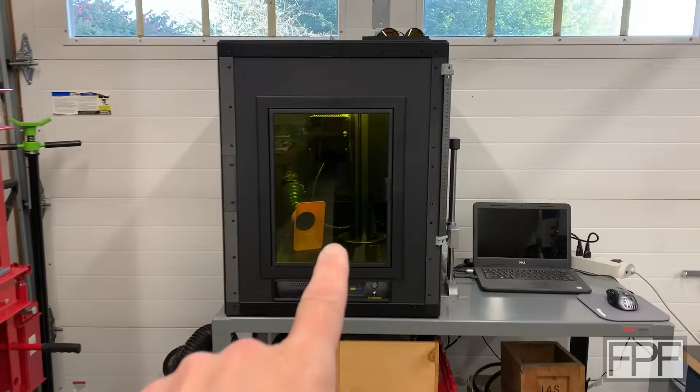It is over there. So about a year ago, right here on the channel, we designed and 3D printed this enclosure for my 30-watt Monport fiber laser. And this enclosure has worked out really great. We finished it out with lights inside so you can see what we're setting up on the engraving bed. It's got fume extraction, and all the parts for this are 3D printed with the exception of the side panels, which are just cheap corrugated sign material.

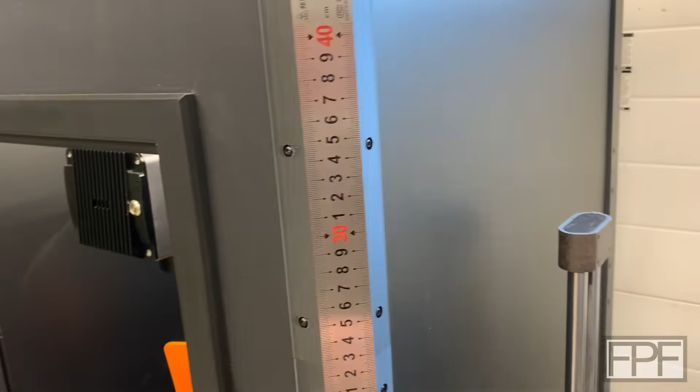Now what you guys don't know is that this 30-watt Monport is not the only fiber laser I have. In fact, someone actually reached out to me a couple of weeks ago when we did the CNC video and asked what happened to the enclosure for the fiber laser. Well, what happened to it is it doesn't exist yet. This is actually a completely different fiber laser. This is a 100-watt fiber laser from Monport.

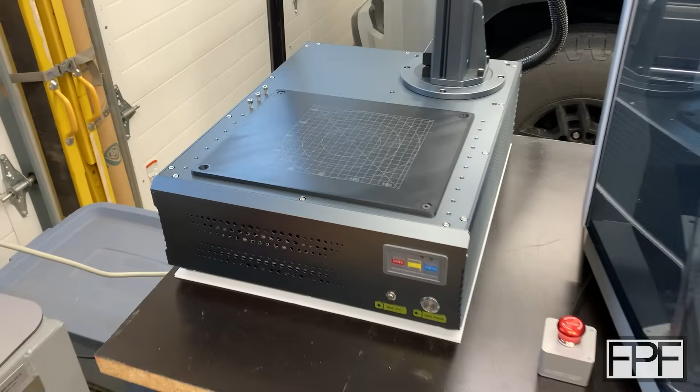I've just been really busy with other projects and have not had the opportunity to actually design and build an enclosure for this. And I want to get started on that today. And I think the biggest challenge that we're going to have in designing the enclosure for this laser versus the 30-watt is, again, this is 100 watts. And 100 watts is quite a bit of power in a fiber laser.

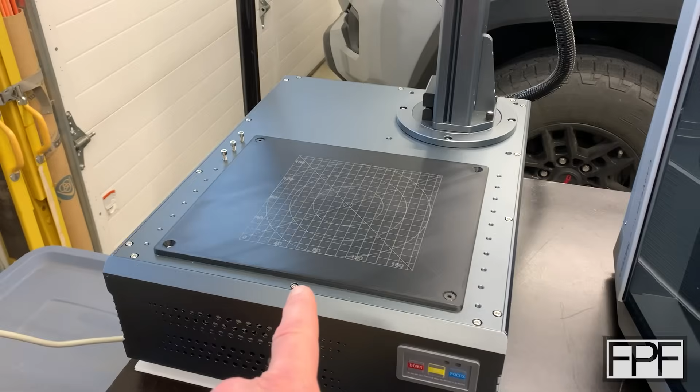Now, I understand in comparison to like an industrial fiber laser that's probably a kilowatt or maybe even multiple kilowatts, that this is still a much lower power machine. But make no mistake, 100 watts on a fiber laser is a good bit of power. This steel is almost 2 millimeters thick, and I was able to punch clear through it with this machine. I did do some just basic testing with it when I got it to ensure that everything worked and the lens was good on it.

So when we designed the last enclosure, a lot of people suggested using extruded rail like this for the frame itself. And I actually have a bunch of this left over from another project. And I think at least these 8 here, longer ones, will probably be long enough for this. I don't know that we're going to be able to use these shorter 4 ones, but I can certainly order more of these.

And I found a laser safety window on eBay that is the correct rating. And I didn't just trust the rating that they said it was. I actually test fired the laser at this with a sensitive surface underneath of it, and this absorbed all the energy of the laser. So we should be good on a safety window. And in fact, it looks like this because I've got it wrapped up in saran wrap to try and keep it from getting damaged. And this is much bigger than the window on the other enclosure.

So we should have, honestly, it's probably too tall. I don't know if you guys can get a perspective of that. So we might cut this into some smaller pieces and maybe even have, I don't know, more than one window.

This is the material that we used for the other enclosure. This is just a thin corrugated material. This is what gets used in sign making. I think we need to go beefier than this for this enclosure. It's not the frame itself that I'm concerned about.

In fact, I think the 3D printed frame parts would probably be sufficient. Even a 100-watt laser is going to take some time to burn through that. Not that the laser would never be able to penetrate it if something went horribly wrong, but you should have enough time to recognize something is going wrong and stop the machine before anyone is in danger. I think it would punch through this almost immediately.

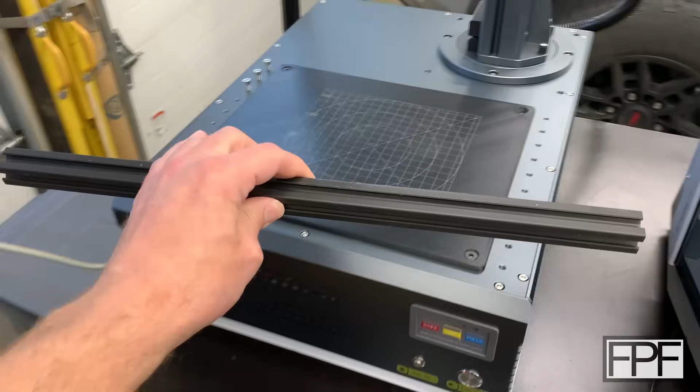So the longest of these rails, there are 4 at 760. I have another 4 at 680. And the shortest ones are 430. I think these 430 ones are probably going to be too short. The narrowest section would be the width, and I guess it technically fits, but there's only about an inch on either side.

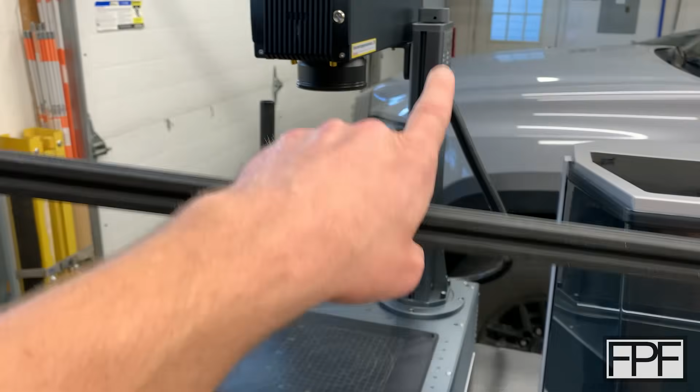You can see from a depth perspective we need way deeper than that, and we certainly need taller in the Z. This machine is actually quite a bit bigger than the other machine - it's deeper in this direction, and it also sits up quite a bit higher in the base. The top section, I believe, is the same size, but because the base is taller, the overall design needs to be taller as well. So I think I'm probably going to need 4 additional pieces in a longer length, but I want to see if I can design an enclosure that utilizes the other 8 pieces.

I want to use that laser safety window that I already have. So I'm going to get some better measurements of these, and I'm going to start drawing, and I'll bring you guys back. And welcome back.

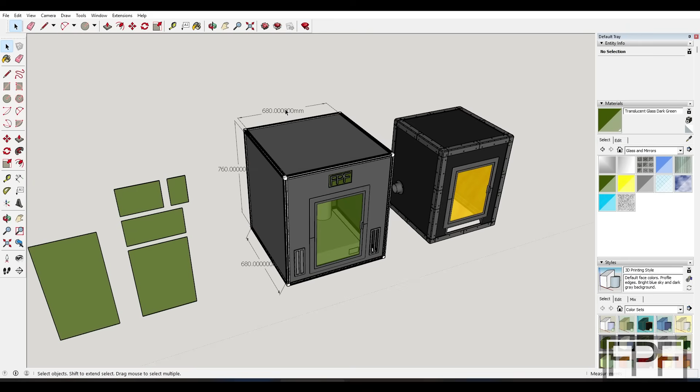A couple seconds for you guys, quite a bit longer for me, but I think I've got a design for this that's going to work. Everything should fit together, and we'll be able to reuse a lot of what I already have. So we had 4 of those 2020 sections that were 760 and 4 that were 680. The ones that were either 420 or 430, they're just too short - there's really no way to use those. So I'll order 4 new pieces that are 680 or longer, and we'll just cut those down to 680 for the width.

I also imported the design of the last enclosure that we designed. I did that partly for a comparison of size, just because I kind of already know what the size of this one looks like in the real world, but also because I figured I'd be able to reuse a lot of the design work we did on this one, because there's still going to be 3D printed parts in this new enclosure.

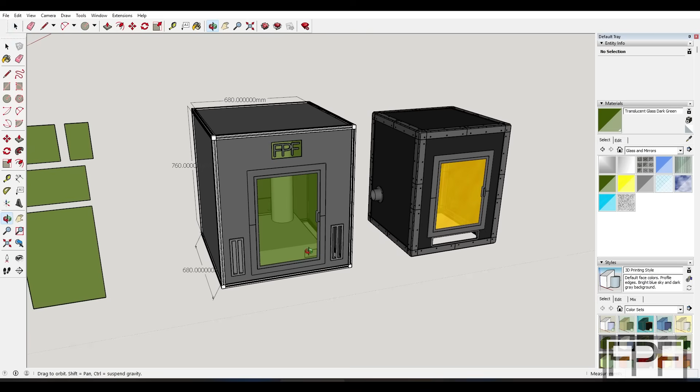It's just the frame itself is going to be that 2020 extruded rail, and these solid panels are going to be a much more substantial material. But I'm fine using 3D printed parts for the outer frame of the door, the inner frame of the door, and the vents here in the front.

We can actually reuse the pass-through for the exhaust and the pass-through for the cords in the back as is. I didn't have to make any changes to those at all. We did originally a side exit on the old enclosure, but we're going to do a rear exit on this one right from the start.

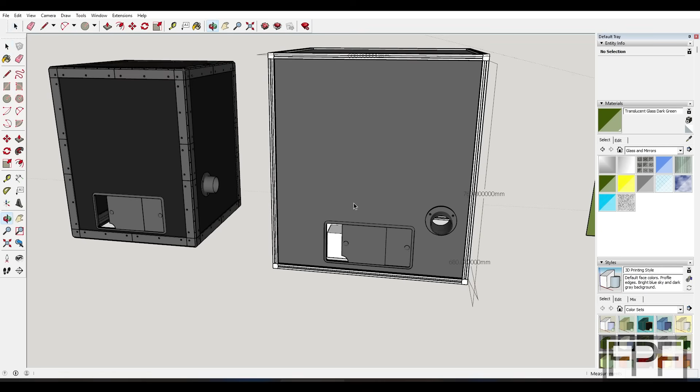And like I said, the slider here, this double door for where the cords are going to pass through, we can reuse that exactly as is. I did adjust the depth of it.

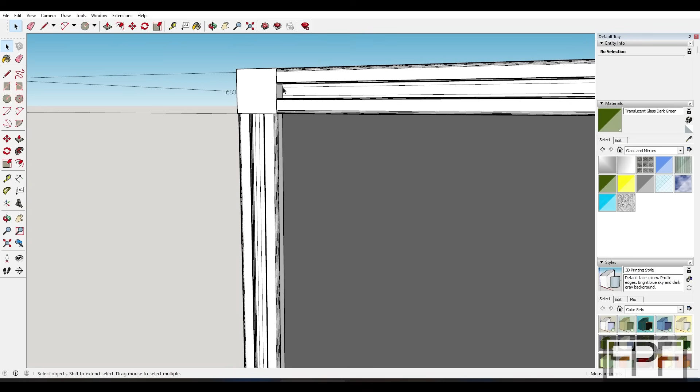I think, if I recall, the corrugated panel over here is either 3 or 4 millimeters thick. The panels for this are going to be 6 millimeters thick, and that aligns with the space we have in the 2020 rail for something to slide in. We could use a thinner material, but I think sticking at 6, this thing should be nice and stiff, and the panels aren't going to move around inside those channels.

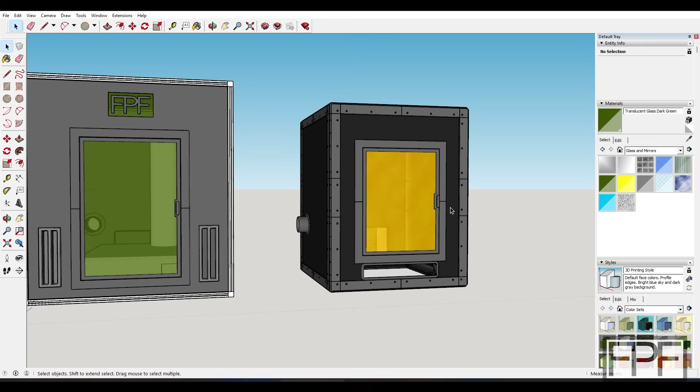For the doors, I did have to make some design adjustments. I couldn't just copy and paste the geometry or resize it to accommodate our larger window. This one was designed in a thinner coroplast material, that corrugated material signs are made from. We did an inner and an outer.

So there's the 3 pieces out here that you can see, the upper, the lower, and then the inner frame of the door. On the inside, there were all these pieces that went around the perimeter of that. Screws went in from here, and we basically sandwiched that coroplast in between all these rigid materials. It works great, and it's held up really well.

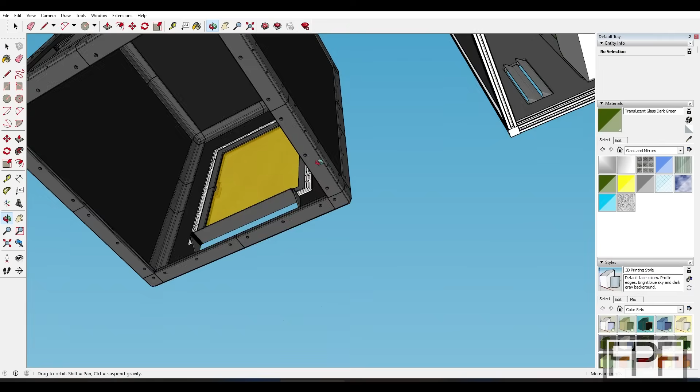I don't think we have to do that for this thicker, more rigid material that I want to use for this enclosure. I think we can pre-drill some holes in this material and have the screws go in from this side and then screw right into our parts that we'll do in either PETG or PLA that'll fit in from the front.

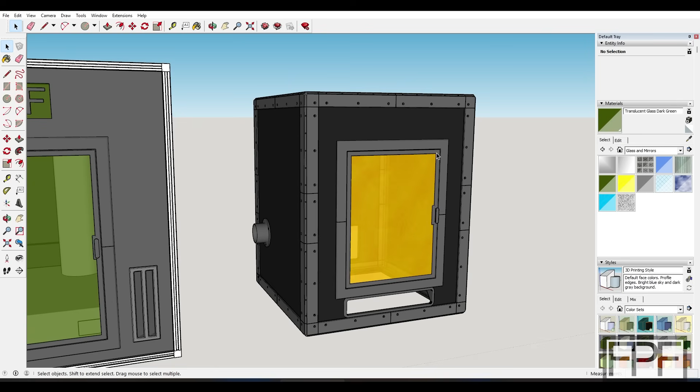Obviously the size is different as well. In fact, when I designed the inner part of this door, I think I sized it to be the largest I could print in one piece, which would have been on that Neptune 4 Max. Now that we've got that Sovol SV08 Max printer, we can do the longest dimension for this door at 500 millimeters. That printer does 500 by 500 by 500, so this edge up here down to this edge down here is right at 500 millimeters.

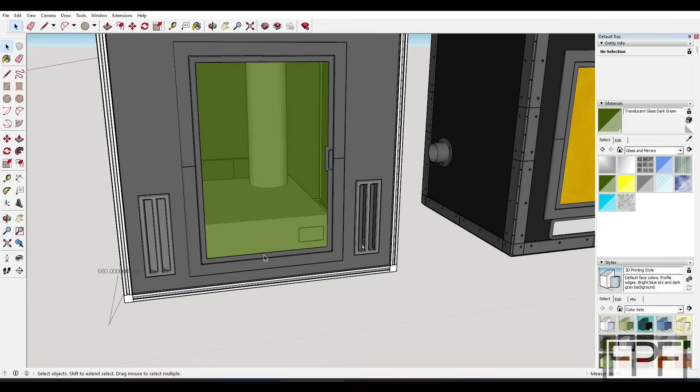Now that's the inner door frame. That means the outer door frame is still going to have to be printed as 2 separate pieces, but again, I think that's going to be fine. I didn't have any issues with doing this one as two separate pieces.

Notice there's no vent down here. The vents are on the side. That's because this vent doubled as access to the buttons. I don't want to do that here again.

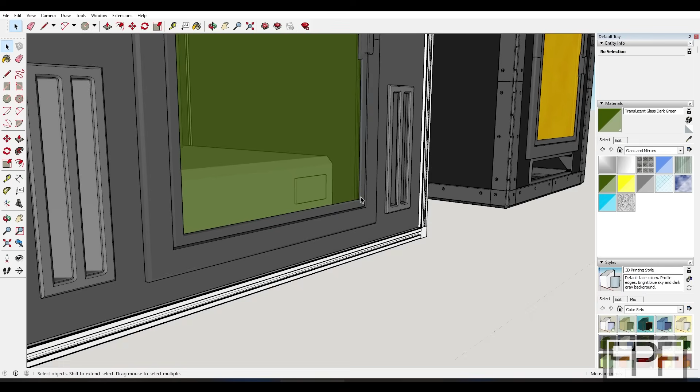What I'm hoping is with the door this far down, when the door is open, with this unit slid back a little bit because we have more depth here than we need, I should just be able to reach through and operate those buttons if I need to. The buttons you're more commonly pushing are the ones in this part of the panel up here, and those should be real easy to access. So hopefully I don't regret that.

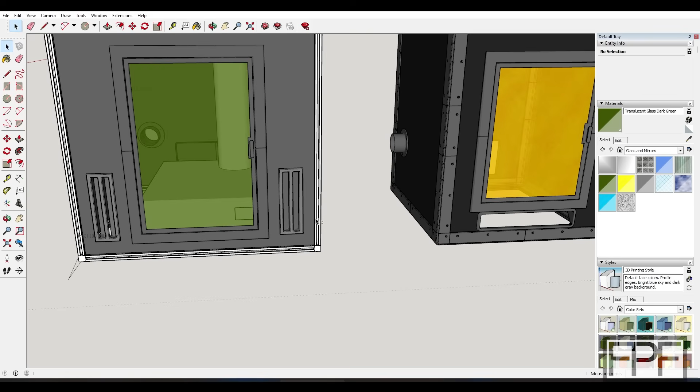But yeah, I don't really want to have a big gaping hole through the front of the enclosure again like I did on this one. I designed these vents to go on the side.

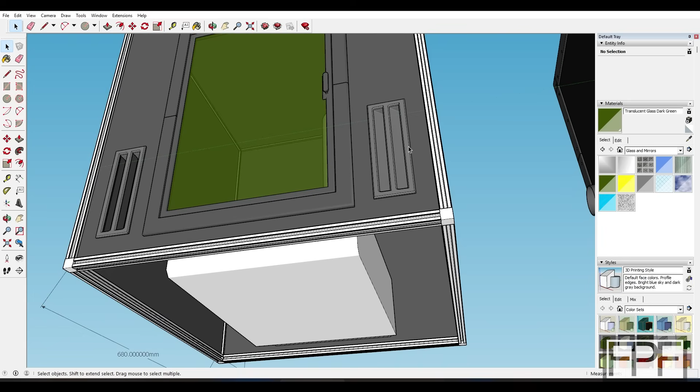The weird angle here, what I was trying to do is just avoid a situation - imagine the laser head is kind of up here. So I tried to design them so there's no way the laser light could make it directly through these slats. There's no angle you could be at where that light has a single path through these vents, regardless of what silly angle you're at, sitting or standing, that the light at a minimum would have to bounce at least once to get through here. And once it has bounced once, between the fact that it's going to be defocused and it's bouncing off something, the wattage of the laser light shouldn't be enough to do harm.

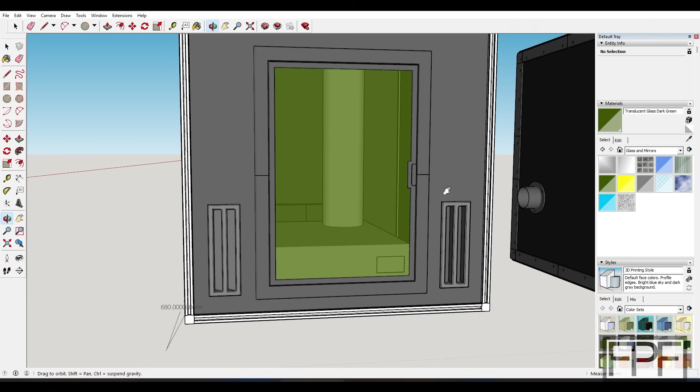I still recommend wearing laser safety glasses even on an enclosed machine. I kind of think the belt and suspenders approach to safety for something that can make you blind almost instantly is probably worth it, but that's a decision everyone gets to make. I see plenty of people operate these machines without even an enclosure, which I think is crazy, but you get to make your own choices with regard to safety, at least in your home.

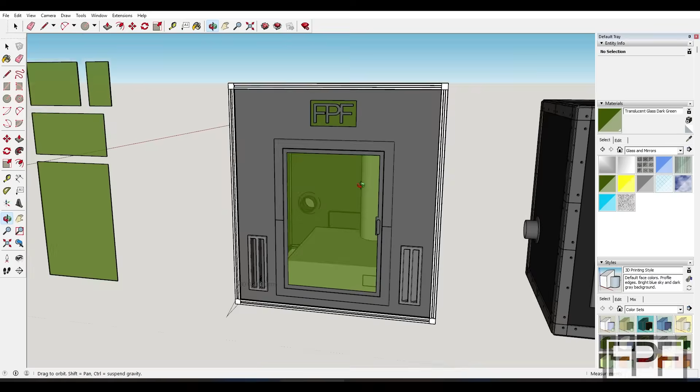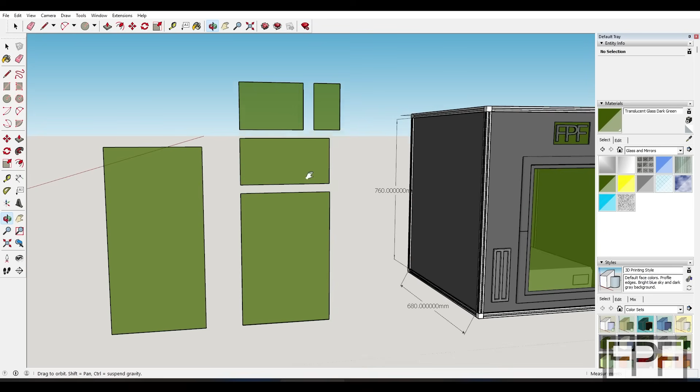Knowing that we're limited to 500 millimeters in the height of this inner door frame, I figured out what the size of the piece of laser safety material would need to be. Here's the whole piece - I modeled that actual piece that I bought, and that leaves us with this chunk up here. I further divided that into two pieces so that we can have a side window.

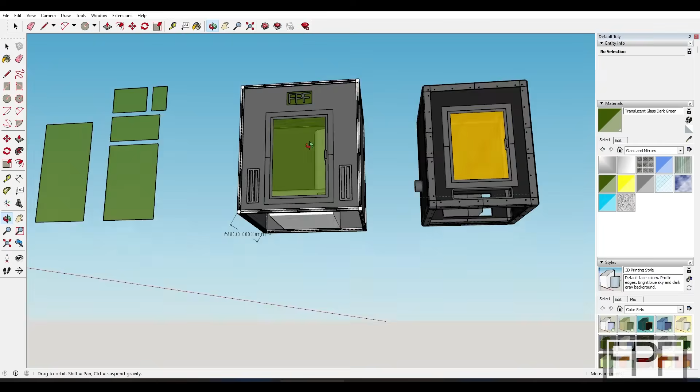One of the things I learned from using this one - there is an autofocus on the machine and it works pretty well, but it's still really nice to be able to look from the side. There's a mark on the side of the gantry for the focus height from the inner part of the machine down to whatever it is you're engraving. You can measure with a tape measure or ruler the distance between that line and whatever you're engraving to confirm you're on the right focal plane before engraving.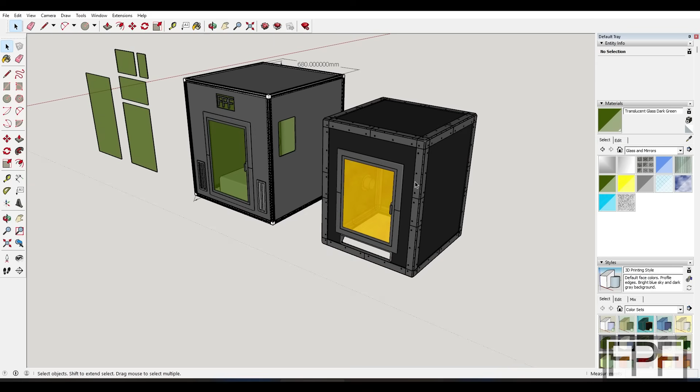You can't see that here because you really have to look from the side, and there's no way to get your head in there to see it. It's completely impractical. If you ever need to use that mark to line up your engraving, you actually have to take the enclosure off.

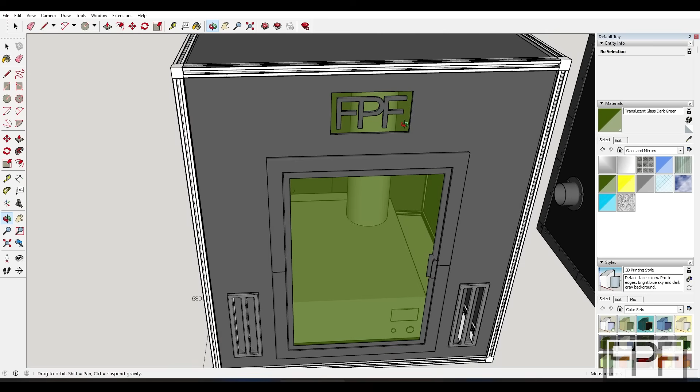With this one, if I position another window here, we should be able to look in from the side of the machine - open the door, hold a ruler in there with your hand, and then look through the window on the side, line it up with that red line on the gantry. I still had a piece left over, even with as big as it seemed practical to make that window, so I thought I'd get a little cute, maybe have a little FPF logo on there. I thought that'd look kind of neat while the machine's running - you'd see the light of the laser flashing behind my logo.

One thing I'm just realizing I didn't bother designing yet is how I'm going to retain that piece of laser safety material in here, so I still have to do that. And there's already a lot of parts here to print.

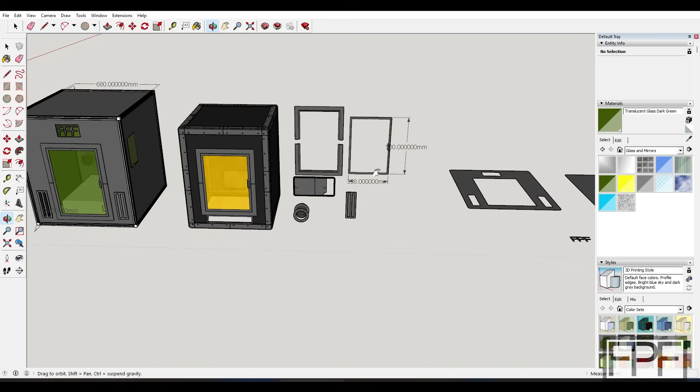Let me unhide the rest of my design space. You can see we have the upper and lower portions of the outer door frame, the inner part of the door frame - this is 3 different pieces. The pass-through for the exhaust is 2 pieces, and we need to print 2 of these.

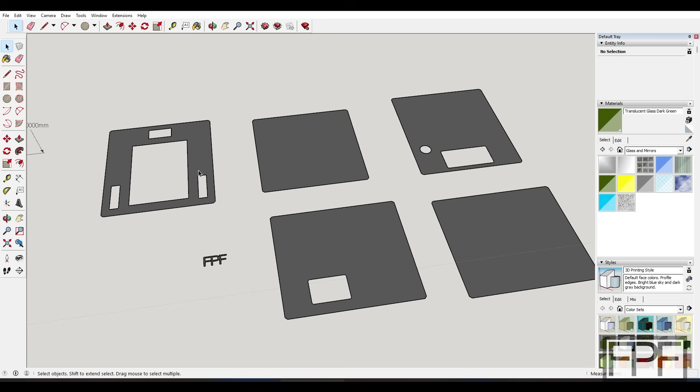That leaves us with the challenge of how we're going to cut these side panels, because I have the design - I know exactly what these need to look like. On the original enclosure, these were coroplast, and that stuff is super easy to cut. If you pop a fresh blade in your utility knife, it cuts like butter. I'd have no concerns, even for interior cuts, about marking it all out with a straight edge and a marker, then cutting with another straight edge and the utility knife. In fact, that's how we did the coroplast panels for the last enclosure, and all our external and internal cuts were plenty good enough that when we popped our 3D printed parts in, it covered up any little bit of sin in the corners.

But we're not going to use coroplast for this. What I'd like to use is either that corrugated core material with a thin aluminum skin on both sides, or the solid core lightweight stuff with aluminum skin on either side. I've never worked with that stuff before, but I don't think it's going to be anywhere near as easy to cut. A CNC router would probably do it, but I don't have one - well, I guess I technically do, but not one that would cut panels anywhere near this size.

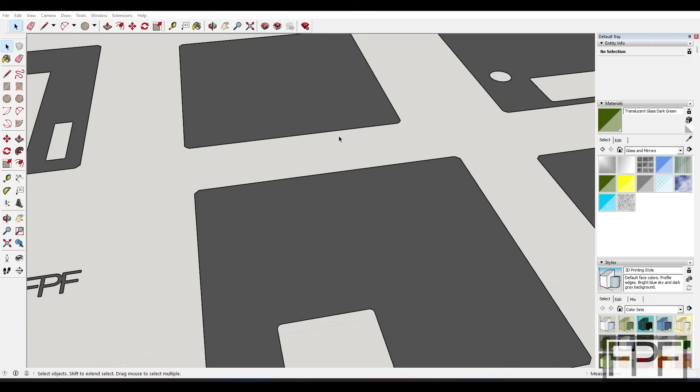Now, as dramatically concerned as I just sounded about this, I actually know exactly how we're going to solve this, and I'm pretty excited about it. So when I went looking for a distributor to order a couple sheets of this ACM panel from, or the aluminum composite material, which is this sandwich of aluminum and polyethylene, a familiar logo came up in my search.

Longtime subscribers to the channel might recall back when I shared the design for this GPS mount that I had come up with to hold a Garmin GPS right at the handlebars on my Honda motorcycle. And before I had even shared this on the channel, I shared this on a couple of different motorcycling forums, and people reached out and asked, hey, can I buy one for my bike?

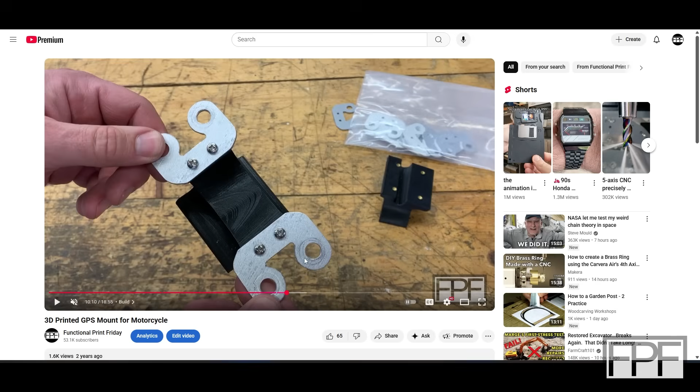And after like the third one of these that I sold, I realized how much I hated making these aluminum pieces. It's not bad when you're prototyping something, but when you're making it for like the third or the fourth time, and it's a lot of handwork and file work to get the details just right, and the position of these bores needs to be spot on for this to actually line up on the bike, I realized there had to be a better way.

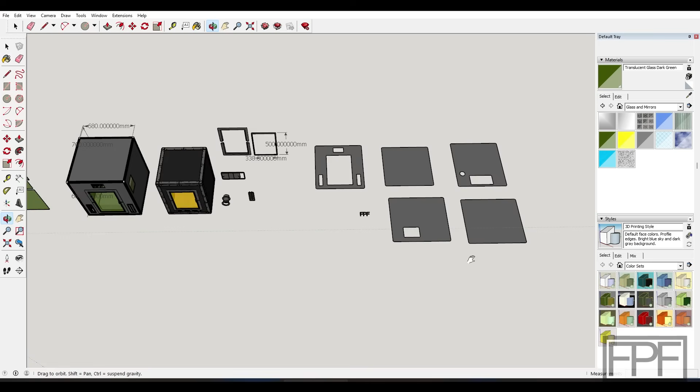And when I say the easiest, I genuinely mean the easiest. All I had to do was just export these flat faces as DXFs. And then I came back over to the SendCutSend website. I uploaded all of those DXFs, picked the material that I wanted the stuff cut out of, and added it to cart. And that was pretty much it.

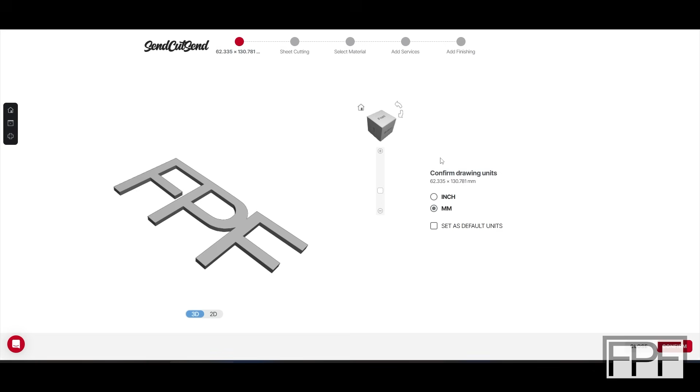Here, we'll actually do one over again. Go with, well, this is the logo. Should be the same as this down here. Yep, drawing units are millimeters. You pick your material, and there is a ton of stuff in here. I didn't even look through everything because I already pretty much knew I wanted to work with that ACM panel, but we could have had them done in titanium. That would probably still be heavier than the composite material, though I don't know, not sure.

So let's see, I went in composites. Ooh, carbon fiber, nope, ACM panel. And they've got it in black and white brush finish. I think the brush finish would probably look the best, but I fear it would also be a fingerprint magnet, so I ultimately chose the black.

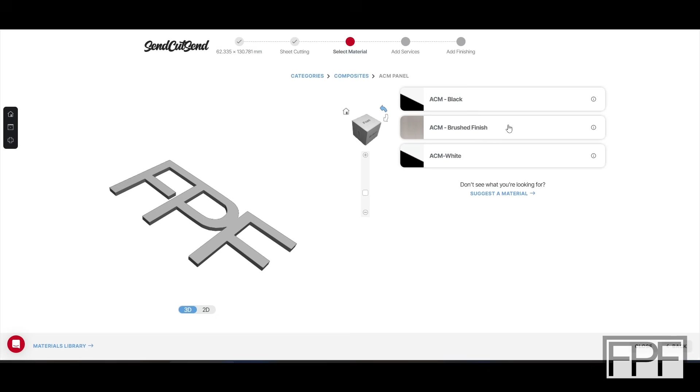And they carry it in the 3mm and 6mm. I went with the 6mm because that is the same width of the internal rails on that 2020 extrusion. I guess 3mm would be lighter, and I bet you the thickness of the aluminum skin is probably the same, but then we would have had to come up with spacers or something. It's just convenient to go with the 6mm size.

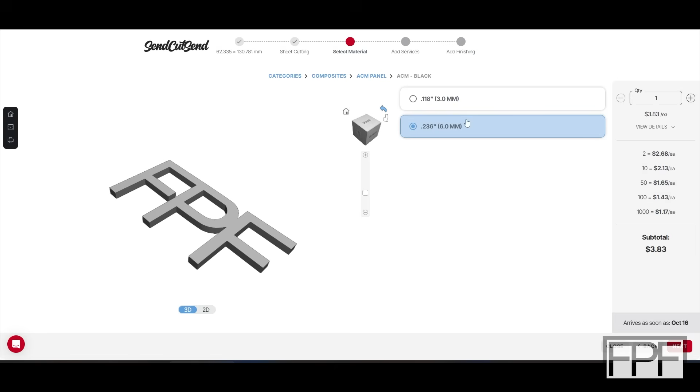It gives you the price as you're choosing options, so you can see what it's actually going to cost you right away. And then they've got a bunch of additional services they'll do as well, like you can upload design for bending if you want the part bent, countersinking, dimple forming, hardware insertion, tapping, and then they do finishing as well. But all of the edges of our parts, I guess aside from this logo, now that I think about it, all the other cut edges are going to be covered either with the 2020 rail or 3D printed parts inserted into those panels.

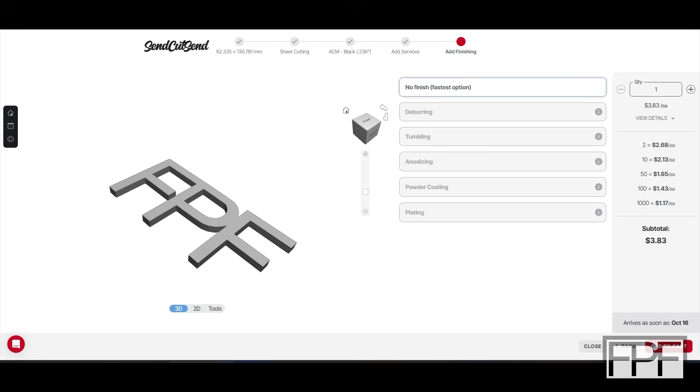So I didn't choose any finishing options. I just added each piece to the cart and checked out. And that's it. So with these parts now ordered and already on their way to me, like I said, what I thought was going to be one of the hardest parts of this build turned out to be the easiest.

I kind of feel like I cheated. Is this cheating? Did I just cheat? I don't know. Comment below. Are you allowed to do this?

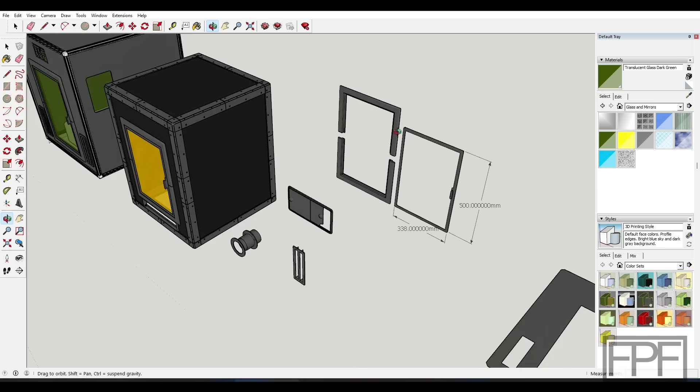Well guys, there are a lot of parts here that I need to 3D print. So I better get started on that, or they're not going to be done before this time next week. And some of these I think are going to be pretty tricky. A lot of these are pretty easy prints, but particularly the upper and lower door frame parts, I remember how challenging they were to get those printed cleanly last time I did this.

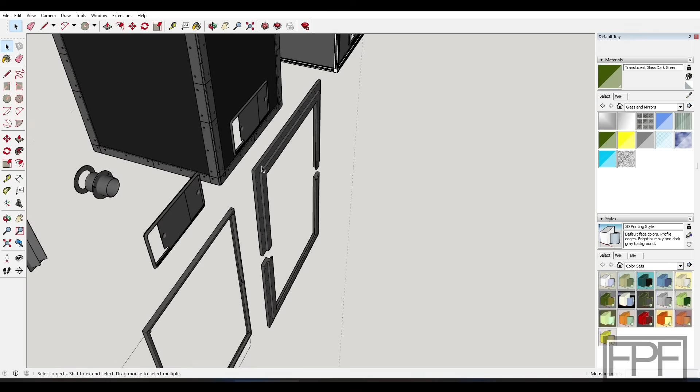Now, the Sovol SV08 Max is a much nicer machine in every way than the Neptune 4 Max that I printed the last ones with. But I'm probably still going to go through at least 2 different iterations of support settings until I'm happy with this, because we're really going to have to print this with this face here down on the bed, which leaves this whole area supported, and then those bore holes up here to secure these in place.

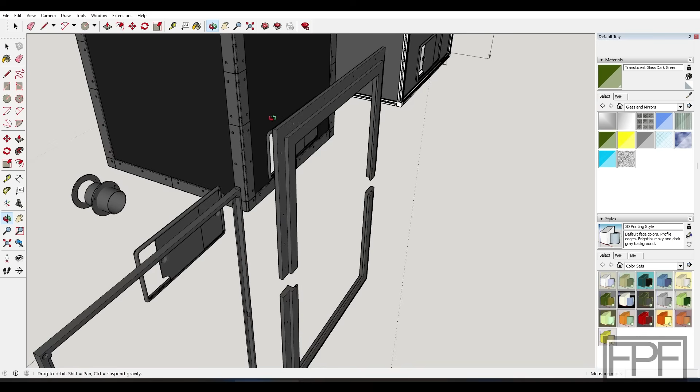And maybe I'll design a template to pre-drill those holes that fits in, and that we can just slip a drill bit in for that front panel. Because I really want everything to be nice and clean on the front face of these. Like this has that bevel, and then a recess section here. We have the bores that the magnets press into, and that geometry has to be pretty accurate for the door to swing in here. So we really need that to be sort of the top surface.

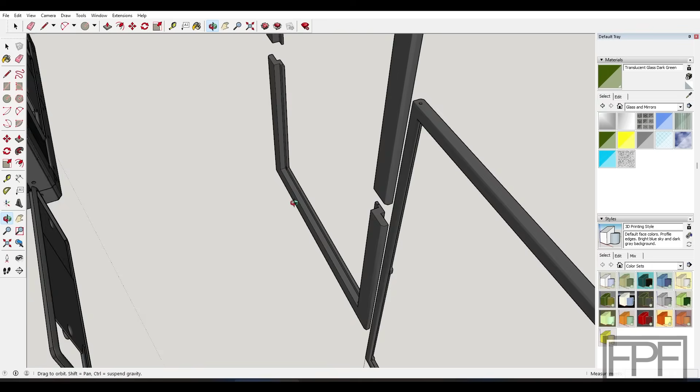I guess we could print them standing up, but that would be pretty crazy, and we wouldn't have strength in the right direction for those parts. So, I mean, I'm sure I'll get them done. But point is, I better get started on that because I doubt they're going to work on the first go.

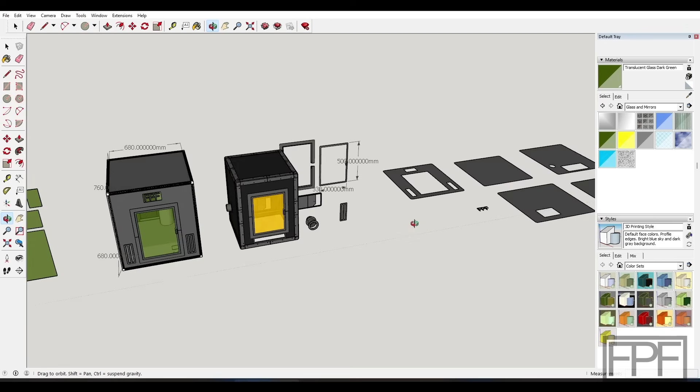So guys, I hope you enjoyed this week's video, and I hope you'll come back next week to see me try and put all this together, because I pretty much guarantee that I did not get everything right on the first try. I really hope I have everything right on these panels, because I'm not going to be able to duplicate those again without reordering those parts and waiting for them again. And I think it's already going to take the better part of the week for those parts to get here. They had a faster option of like 2-day shipping, like if you're in a rush for parts, but the standard turnaround, we'll get them here in plenty of time for next week's video.